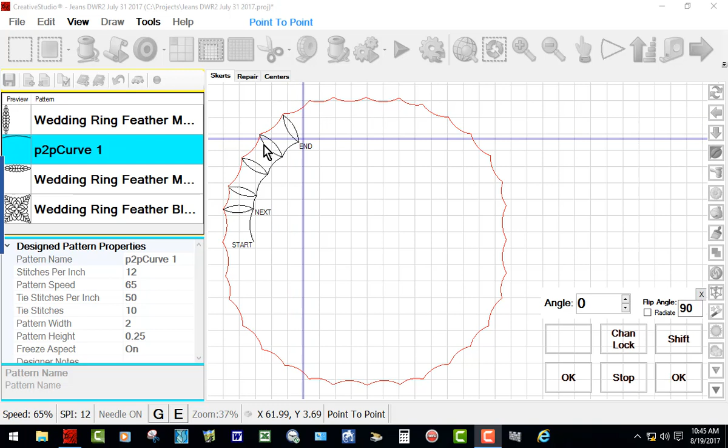I'll move up to my next intersection and click, then go up the seam line of that little block, and then back, and then over to the next one. And see, this is how it, just by changing the direction of travel, it does exactly what I want it to do.

I think this is enough to show you exactly what I'm talking about.

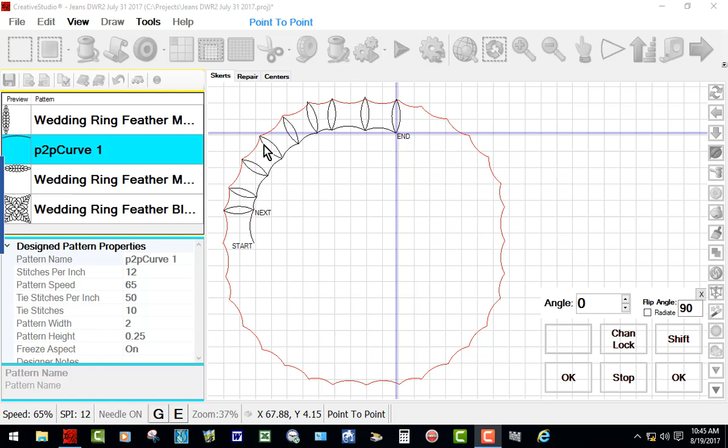I have finished going all the way around the ring, and now all I need to do is stitch this section out and then come and fill in the edges of the skirts on the inside, and then place my patterns in the melons and in the center.

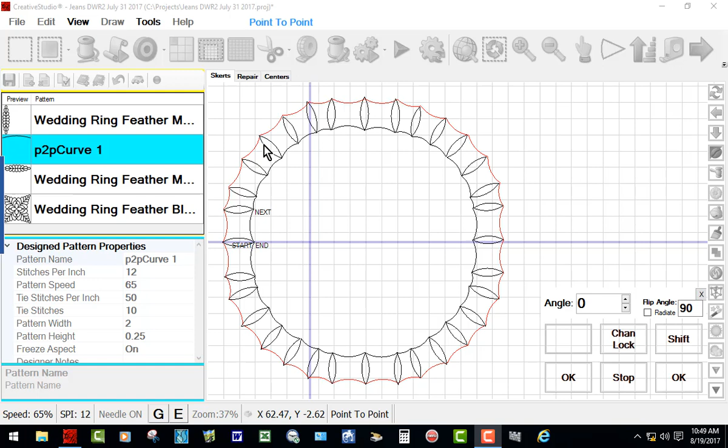Okay, I have put in all of the little p2p curves in those outer ring, and here I think we can see that it takes 127 of these, looks like, to go all the way around this.

Here's where I started right there with 0 and went around the outer edge. Then after I quilted that outer edge, I went back and put in the inner, and then the little curve in the seam line of each melon piece.

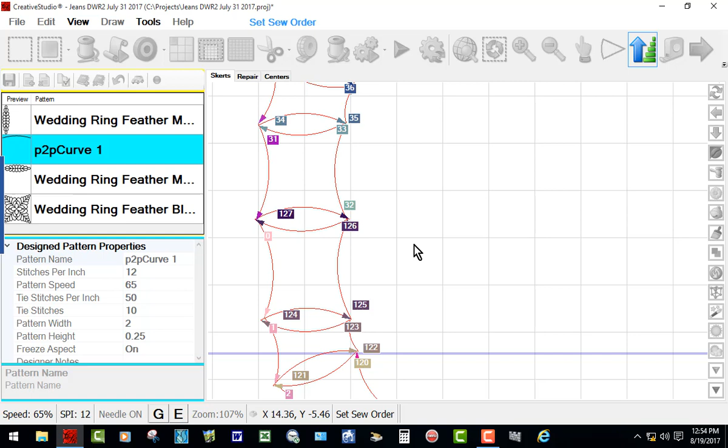So see, I went around, started 0, here's 31, that's that last arc there. Then it starts with 32 going this way, 33, 34, like that. And then when I got back to this point here, this was 25, then 26, and 27, all the way to 127. So it takes that many just to go around that outer edge.

I still have to put in the little skirt part here, here, here, and here, and then put the patterns in these melons and the center.

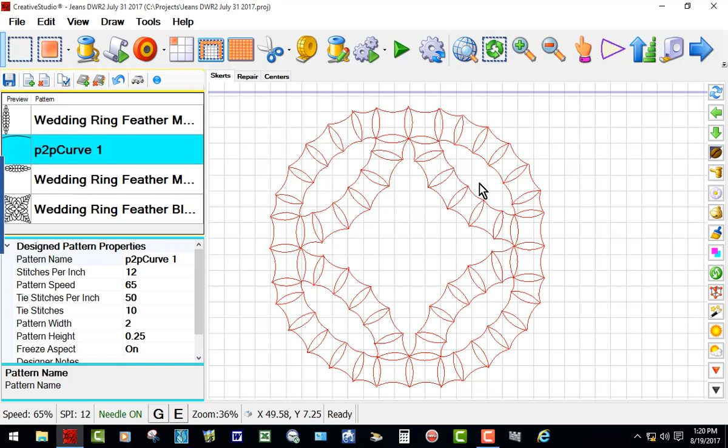All of the p2p curves have been stitched, and now all I need to do is draw some boundaries around these, and place these melon patterns in all 4, then the center pattern. I probably could put those in there without drawing a boundary, but I like to see the boundary and just make sure it fits the way I want it to.

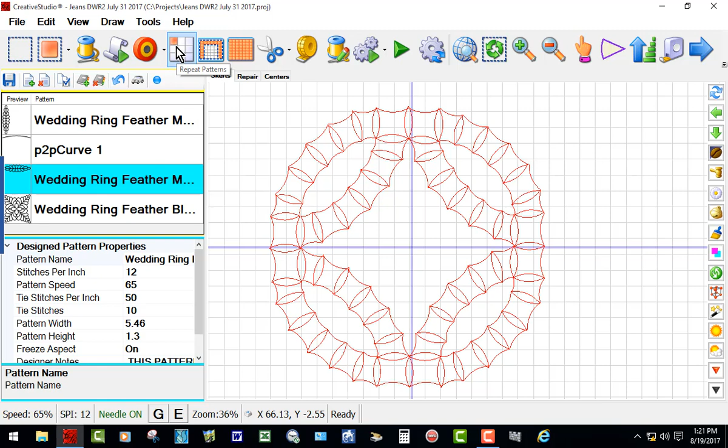I'm just going to select one of the melon patterns and put that in here, and I'll have to move them. I'll place one copy in there, use repeat patterns, and I have center as my reference point, so it'll center that around this crosshair. So I'll just click OK.

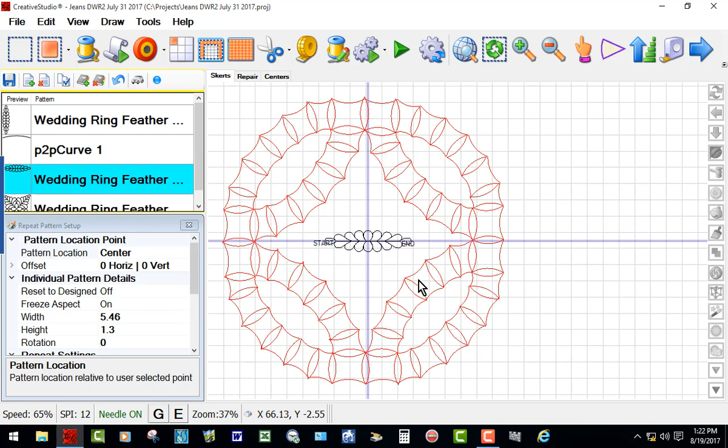Now I need 4, so I need 3 copies. And I know in 7, we have this new copy and paste. Well, if I select this, right click, I rubber stamp it 1, 2, 3 times. I think I've just made 3 copies.

So I'm going to move this one down here, hit my less than key, one over here, less than key, that one up there. I'll grab this one and put it there. Now, it's easy to place these.

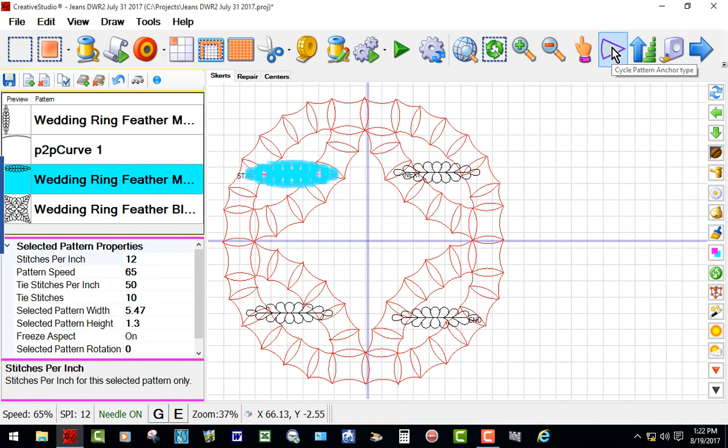Because what I'm going to do is make sure I don't have grid or end snap on. I'll just grab this, and I'll place these in that area.

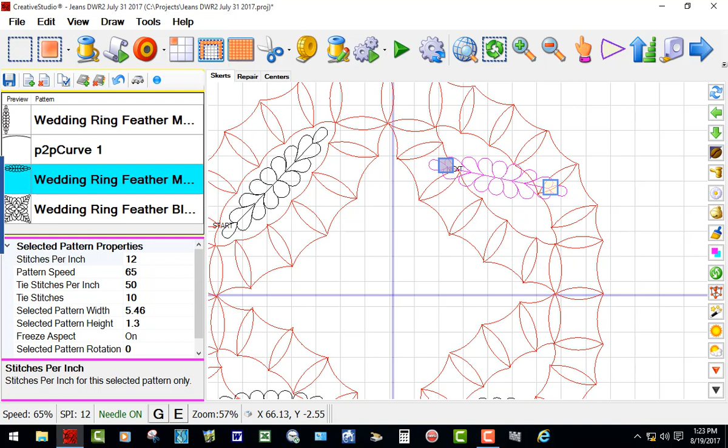Do the same thing. And it doesn't matter which way they're oriented, whether the start is which direction it starts and quilts. So, just play with this, get it to stay with the end anchors.

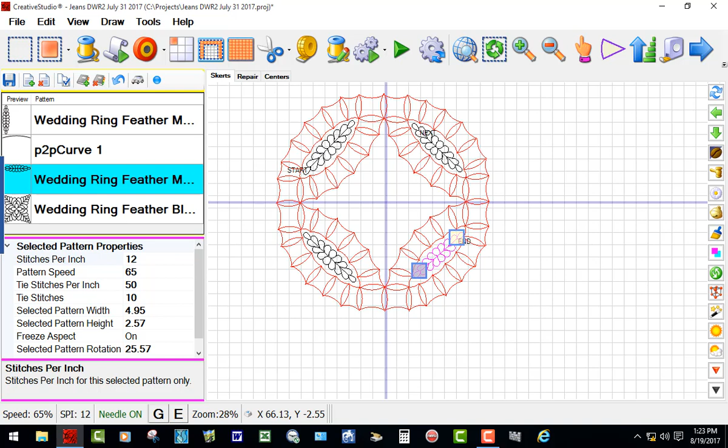Just roughly put these in place, and then I'll fine-tune them later. And there they are. They're in place relatively good. But now I don't know exactly how this is going to work with the space.

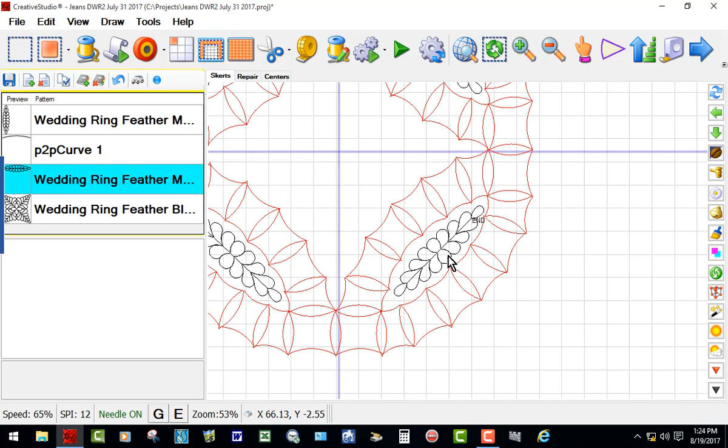So I'm going to go and place some boundary clicks in here, and then I can precisely adjust these to fit.

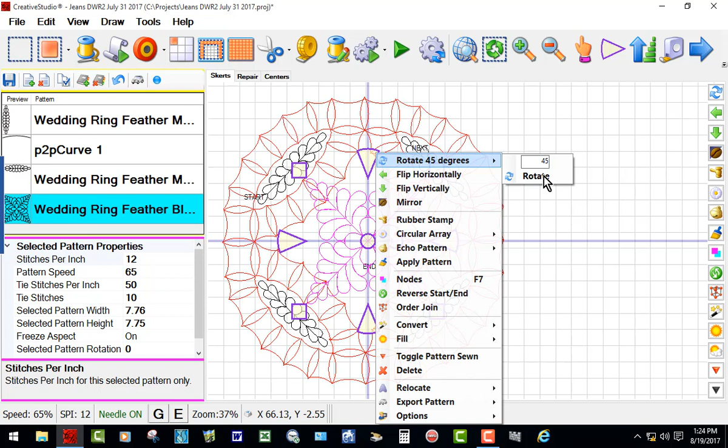Also, while I'm at it, I think I'll just go ahead and put this one on this in that center. And you see I have to do a little rotating of this. Get my edge anchors, right click, probably can rotate this 45, and that should pretty much get it to where I want it. Yeah, see? So I will fine-tune this placement when I do my boundaries.

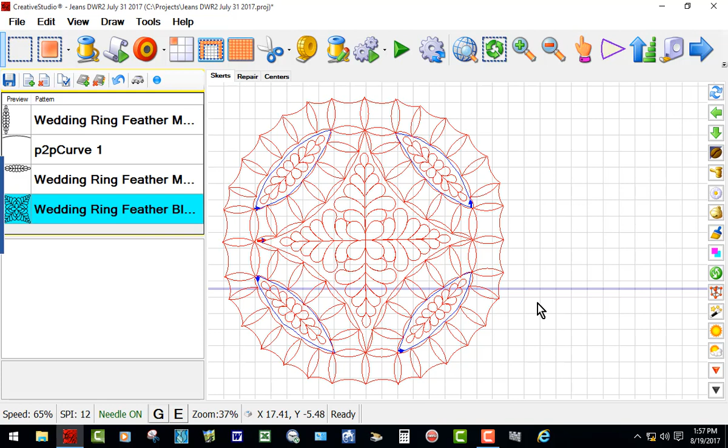Okay, everything on this sham has been stitched. So I'm ready to put the other sham on and stitch that.

Now you have to understand that there's a piece of material that is not shown here, but I did not quilt the material along here or down along the bottom and on this side. This is just in the center of this material, top to bottom and left to right. And this area will not be quilted. So she'll just make a pillow sham out of this. So that's how I did all of that.